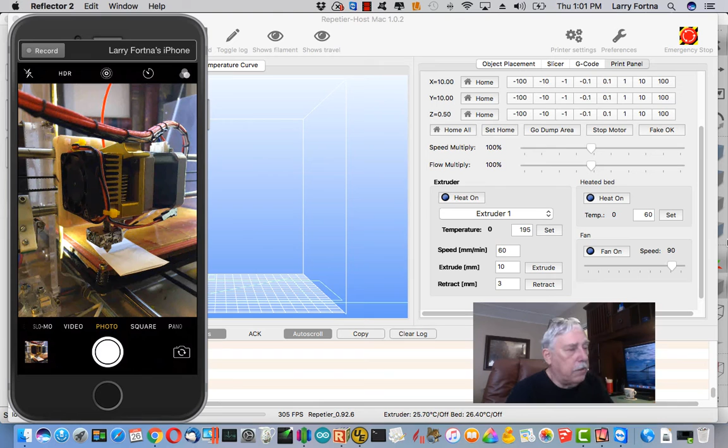I clean it up periodically with a little alcohol, and I have some real super fine sanding pads that are like 4,000 to 6,000 grit, which I can clean it up with. Okay, that said, this was an acrylic printer, and I keep it stabilized because I have it on a sheet of 3/4 inch MDF that you'll see here.

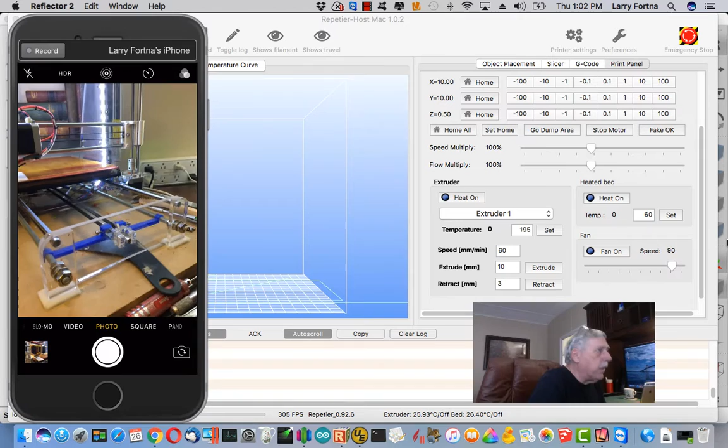Now this MDF is a very flat piece of material, and I've printed some hold downs to keep the 3D printer from moving around. And these are just glued onto the MDF, and then the 3D printer sits on top of that. So I've got hold downs back here, and I've got hold downs over here. And they're not really hold downs, they're just keeping it from shifting, from moving. Other than that, it was stock from the printer that was sent.

And I did find one other thing, which we'll talk about just briefly here. It uses an Arduino circuit board along with a Ramps 1.4 motherboard, which controls the stepper motors and such, and the heat bed. And what I found with these boards is they use a crimp style connector for the heat bed connector, and it builds up a high resistance because there's a lot of current drawn through there.

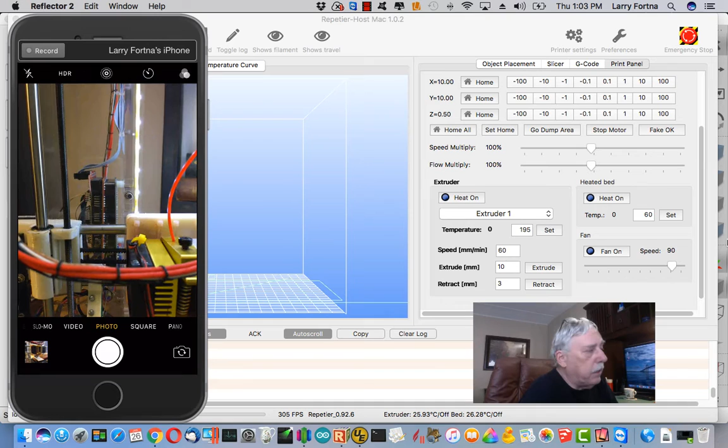And I've actually melted the plastic on one of these connectors, and I have now soldered the heat bed directly to the back side of the board where the connector is on the Ramps board. And what this has done is allows the heat bed to heat up much faster, and I don't get that heat buildup, and so it's safer. I don't have a risk of the thing catching on fire.

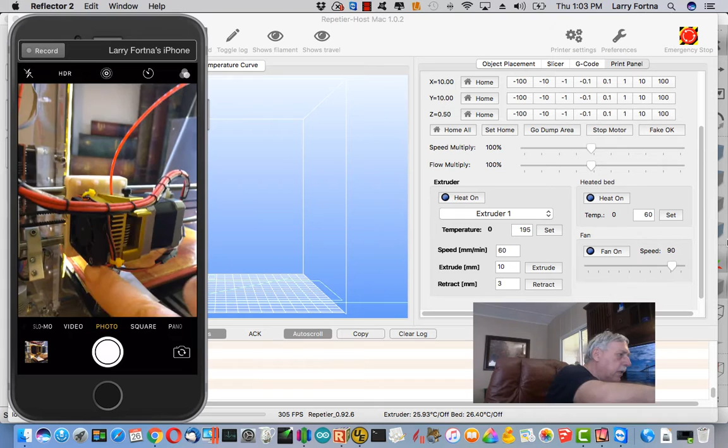So this extruder is the MK7 model, and I just modified it a little bit to put a fan on here. It's held in place by 2 screws, and I have a connector which I can release, and I can take those two screws out, and this heat sink and the fan come off, and I can easily get inside to do anything I need to do to the extruder.

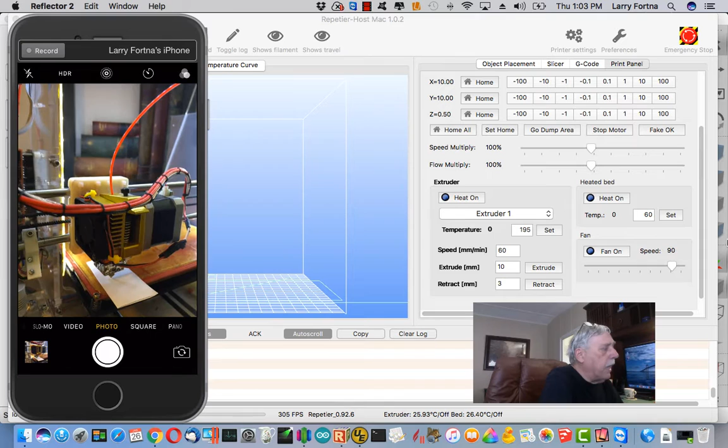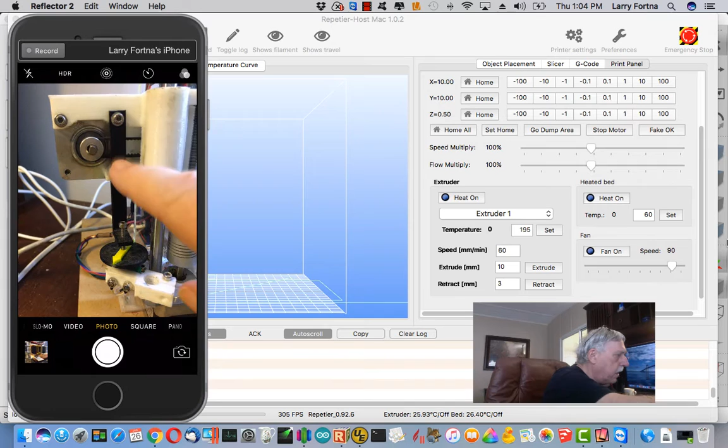Now, the most important part that I added to this 3D printer is right over here. Basically I just took this white piece here that came with it, and it used to go on this shaft, and I drilled a hole in it, and I moved it over here so that I could put my limit switch right under this piece here, which I printed on my 3D printer. And this screw in here is a 3mm fine thread screw, which allows me to do a very fine adjustment of the Z-axis.

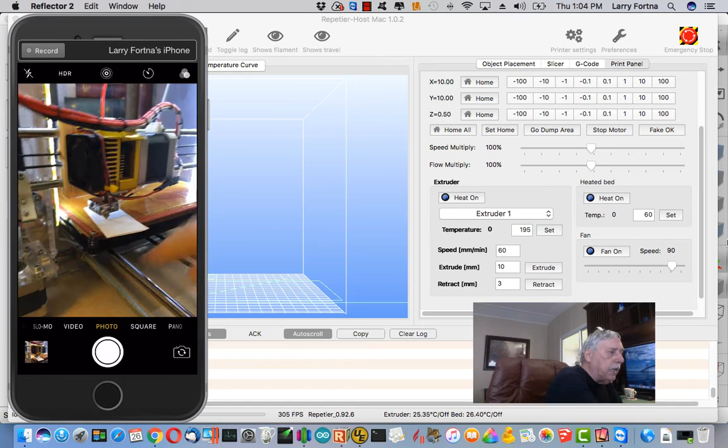Now, what happens when you heat up the heat bed is these little springs over here heat up, so they expand and they contract. And when they heat up, they expand and they bring the bed up more towards the extruder. So when you're adjusting your bed, it's best to do this while the heat bed is at the temperature you're going to be printing.

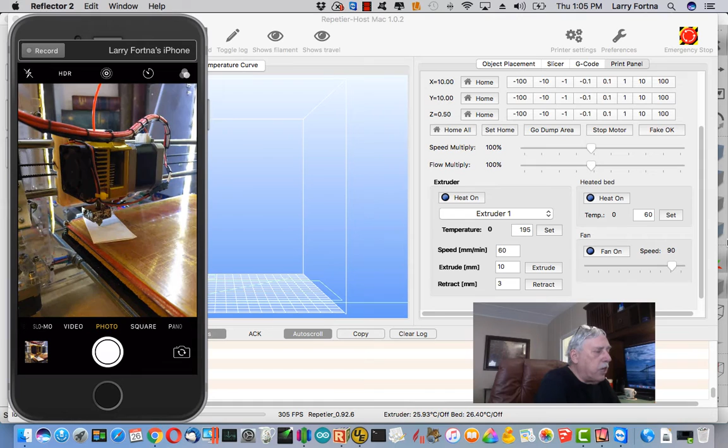I see along the forums there's a lot of folks using these automatic height adjustments. That is not needed, folks. It's not needed at all. You need to spend just a little bit of time to make sure that all four corners of your heat bed are at the same height. And once you've done that, all you need to do is change the relative height of the bed when the bed is up to temperature.

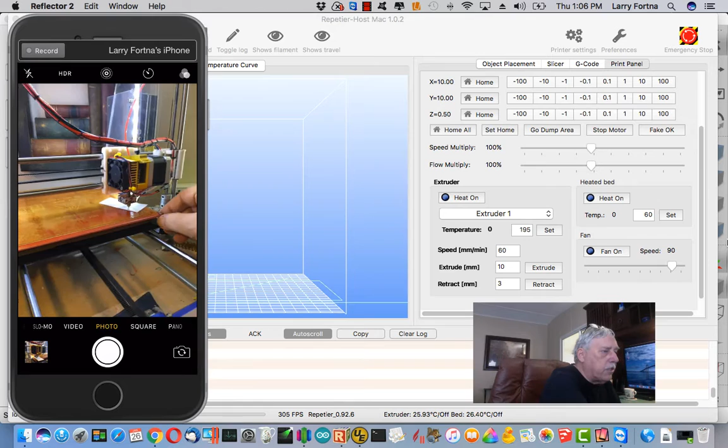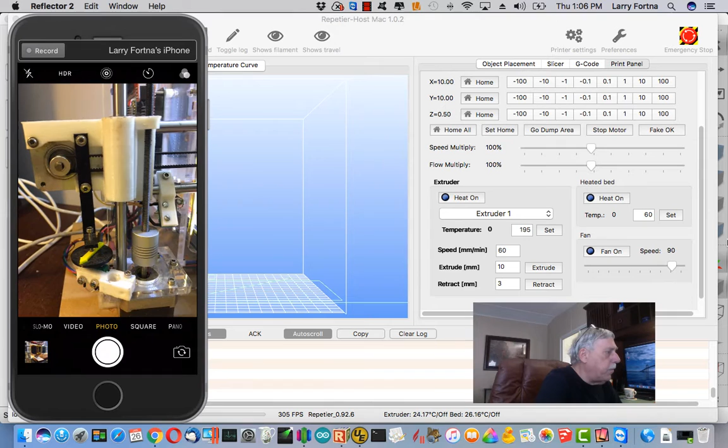So I'm just going to show you how my bed can drag this sheet of paper all around the bed, and it's just lightly touching the tip as I barely move this sheet around. Once this is locked into place, the only adjustment you need to do from there on is to get your bed up to temperature and do a fine adjustment here.

So you zero your Z-axis so that a sheet of paper, which is 0.2 of a millimeter in thickness, just fits under the nozzle. Now this assumes that you're printing at 0.2 of a millimeter. I print at 0.3 of a millimeter, which is okay. That's just going to give it a little more solid adhesion.

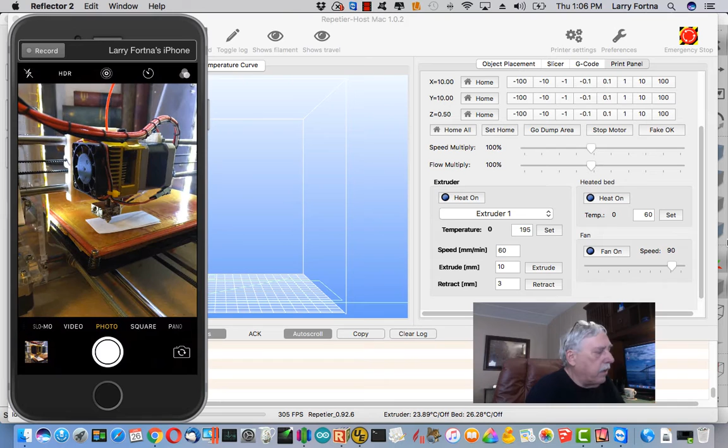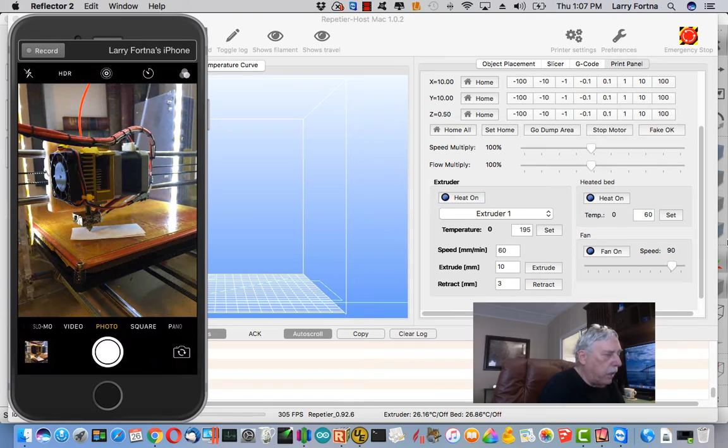Something to be observed here on my 3D printer: when I put the heat bed on, I put some cork. This is 1/4-inch cork that sits underneath the heat bed between it and this travel acrylic that holds the rails and the bearings and such. I put the cork in there to keep the heat from transferring to the acrylic, which will warp it and cause you problems. So that's something you might want to do in your 3D printer.

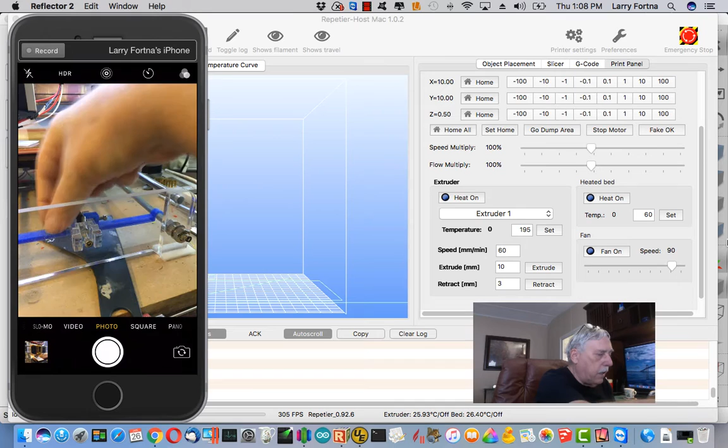The only other thing I found with this particular model was this Y-axis belt tensioner. It was on a spring, and it went side to side, and the belt would jump off the center of the bearings and would fray the belt. So again I 3D printed some supports that I can adjust right here and here, and I got it centered now so that it stays in place, and that gives me a nice Y-axis movement.

A couple of things to consider when you're zeroing your bed, and that is to use a bubble level. I have an application on my iPhone called AppZilla that has a bubble level that reads out hundredths of a degree. So I put my iPhone on the bed here and get the reading, whatever the levelness of the MDF is here.

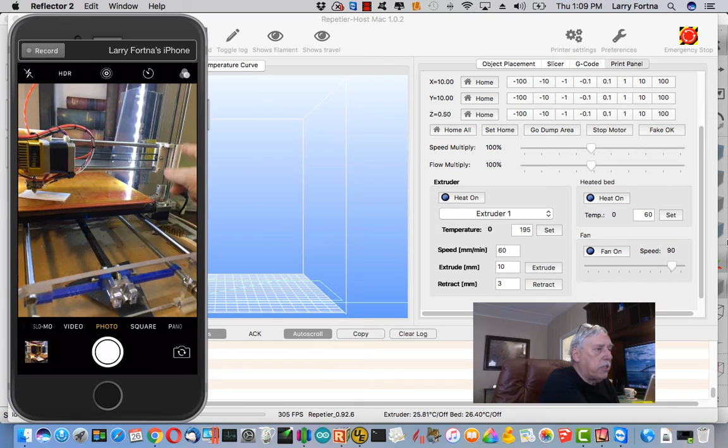And then I make sure that when I put the bubble level up here on this rod, these two should be the same or very, very close to the same, so that you can adjust either side of your Z-axis by turning these stepper motors. You want to make sure that this piece here is level with this piece. And then go through and do the four corners and double check your center.

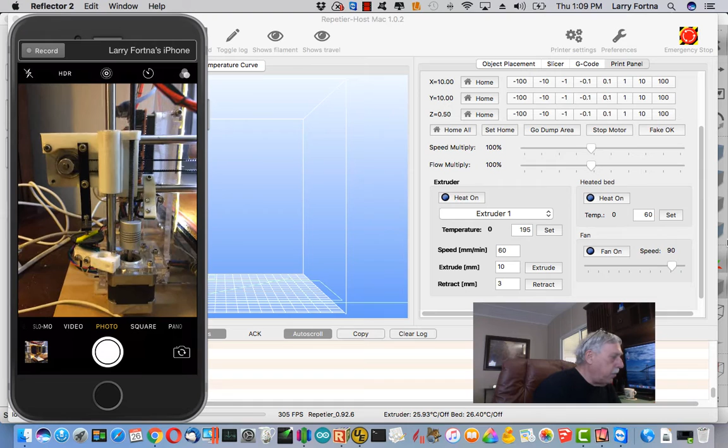Once you've got all that set up, the next step is just to heat your bed up to operating temperature, zero your Z-axis, and adjust this screw so that this piece of paper fits in it just like this. This is extremely loose. It's just barely touching the nozzle. Okay.

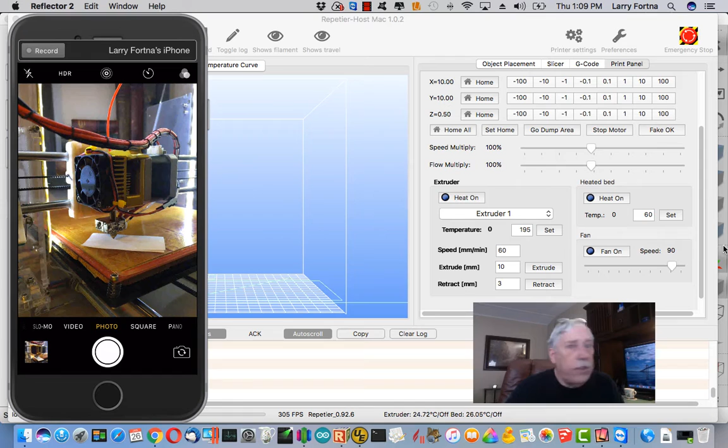Now, with all of that said, let's go look at, I'm using Repetier Host here. I also use Repetier Server most of the time, but Repetier Host to actually do the 3D printing. I don't use Simplify 3D for that. Just my preference. This particular program is for the Mac, and they also make one for Windows. It looks a little different on Windows, but they have all the same settings. And so this is what I'm going to actually print with.

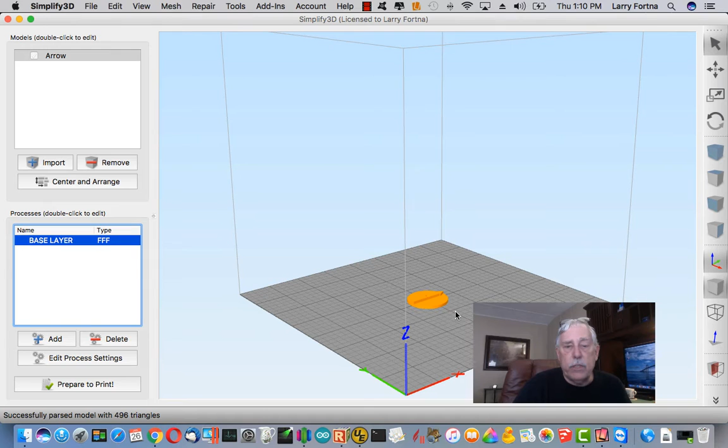But what I really wanted to show you is Simplify 3D, which is a piece of software that generates the G-code for Repetier Host. We're going to print this little arrow that I have on my Z-axis adjustment. And if you'll notice, my Z-axis adjustment disc had two colors in it. So we want the arrow to be a different color than the rest of the base part of it.

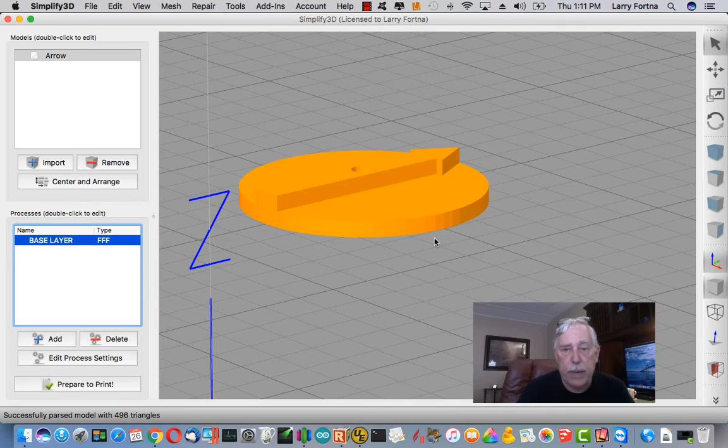So I want to go through the settings that I use on my Simplify 3D and share with you some of the tips that I have run across over the past year that make my prints come out very well. And some of these things I discovered quite by accident. I'm going to talk about that as we examine all these different settings.

So to start out with, let's go to the settings panel. I've just named this first layer base layer. And because I'm using PLA, I have a particular setting set up here also for how much my infill is going to be, which I've set to 55%, and I think that works pretty well.

For the extruder, I've named this extruder tool 0, and this is going to be important when we come to doing two-color prints, because I'm going to give you a different tool number for the second layer that we're going to create. But let's just kind of go through these settings real quick.

I've set my retraction to 1.6 millimeters. This helps to prevent blobs from appearing whenever the layer height changes. My nozzle diameter is 0.40, and my extrusion multiplier I've set to 0.95 only because I don't think I have my extruder calibrated exactly, and it also depends on what filament you're using, but I reduced that just a little bit.

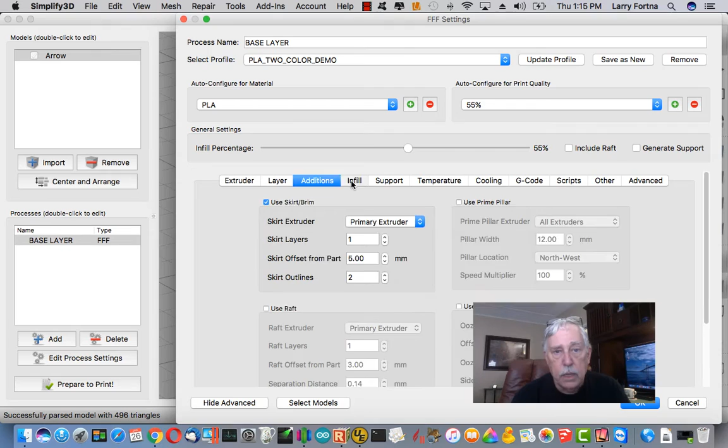As far as additions go, I'm printing a small part here, and I'm going to leave the speed up at 7,200. So for that reason, I'm going to print a couple of skirt outlines to get the filament started before it actually has to start doing the part itself. For infill, because this is the base layer, I think I might change this to concentric because it's a circle that I'm printing. And for my infill pattern, I think we'll change that to fast honeycomb.

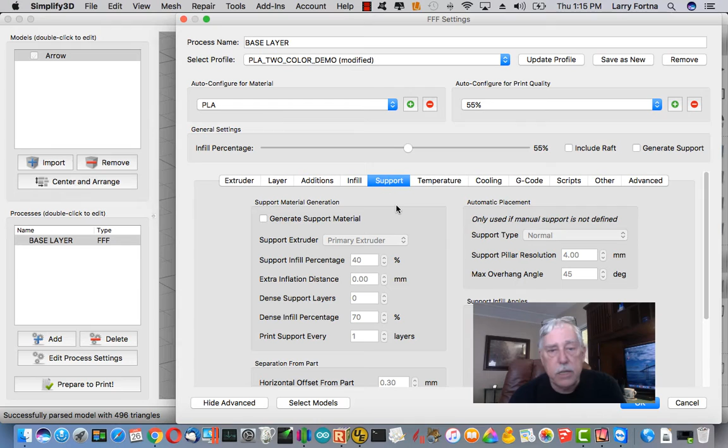I've set my interior fill percentage to 55, my outline overlap to 45%, and my extrusion width to 100%. So those all look good. This particular part doesn't need any support, so we're not going to do anything with that. But let's talk about the temperature. My heated bed for PLA is set at 60 degrees centigrade, and that is more than enough for PLA.

For the primary extruder temperature, normally for PLA I would set this at 195 degrees. But what I have discovered is that if you're printing at speeds of 7,200 millimeters per minute, you need to have that temperature up there. It needs to be hotter so that it can continue to flow at those speeds. The other thing this does for you is the hotter temperature makes the PLA become glossy. So I get a nicer looking finished product at the higher temperatures.

Even if I was to print this at 3,600 millimeters per minute, I would keep that temperature at 226 because it will give me that glossy finish that I'm looking for. If you do it at 195, it's going to handle the filament, it's going to melt, and it's going to adhere, but you're not going to get the gloss out of it.

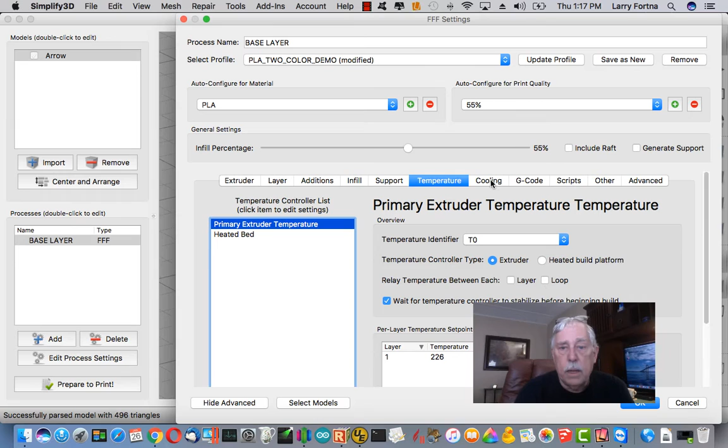Okay, now let's go on to cooling. I just set my first layer fan speed to 40%. And when we get over to the G-code, this is just the stuff that defines my particular printer, so sizes and all of that.

For scripts, my starting script is a G28 that homes all the axes. And all these other scripts in here, except for the ending script, have nothing in them. My tool change is empty. My ending script has some parameters in it to turn everything off when it's done. We covered the other section.

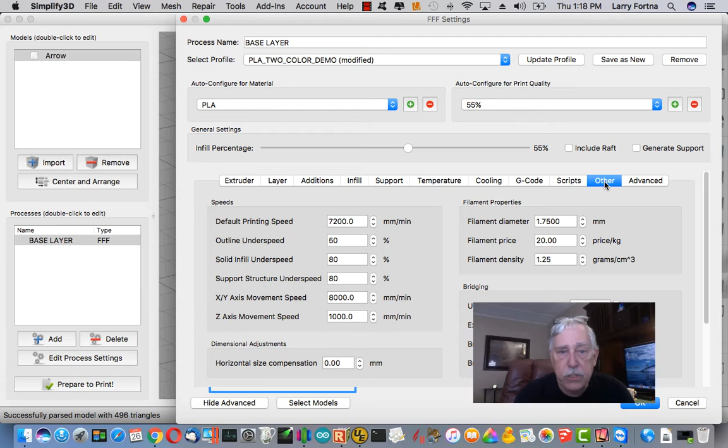That's my section there. And then for advanced, we have a couple of interesting things if we're going to do two-color print. We have a starting print height and a stop printing height. And we're going to use that today. But first of all, we need to know exactly where we want this two-color print to start. And to do that, I'm going to go up here and view the cross-section.

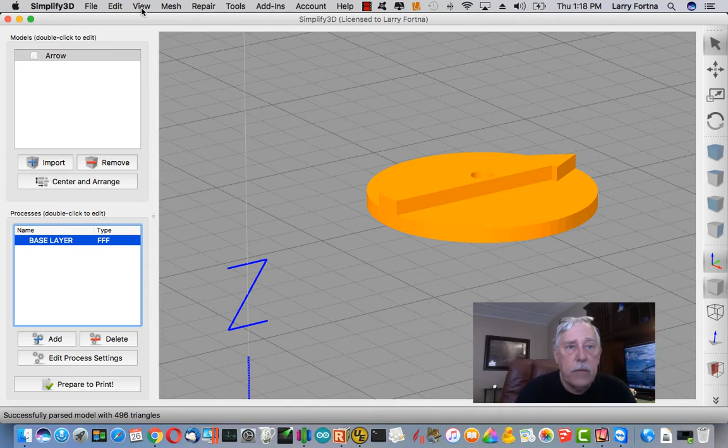And I'm going to start bumping up the z-axis here. And once I have found a point where the base layer is complete and the next layer, the arrow in this case, is going to start, I'm at about 2.1 millimeters, maybe 2.2. If you're using a 3/10 of a millimeter height, then you probably want to use 2.1 millimeters as the settings that we're going to use next.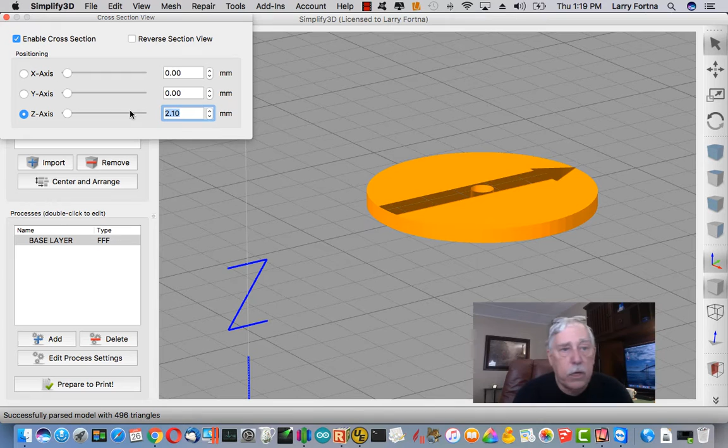So now that we know that, we'll go over back to our settings and we'll go to Advanced, and we're going to do Start Printing at 0, but we're going to stop at 2.1 millimeters. Whoops, I'm sorry, I didn't mean to. Now I got to go back and do that again. Okay, and let's OK that so it saves it. Okay, now we have our base layer taken care of.

Now we're going to add another layer, and this is going to be a copy of the first layer, and we're going to call this second color. Okay, so now what I want to do here is go back to the Advanced tab, and now I want this one to start printing at 2.10 millimeters, and I'm not going to have a stop printing height. I'm going to let it complete.

But here's the important thing I need to do next. I need to go over to this extruder on the second layer and tell it that it is tool number 1. And the reason for that is because I want to go into my scripts over here, and I want to add something in the tool change script. And that's something that I want to add is a command called M600. And this is a filament change command that is used in Repetier and also in Marlin firmware.

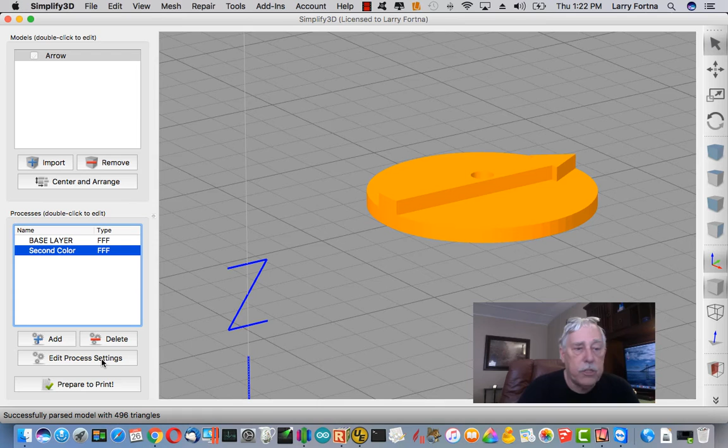So we only do this tool change on the second color layer, and we have to change the extruder to be a different tool name so that it knows that we're changing tools and it knows to execute this M600 command. Okay. So now we've got pretty much everything set up that we need. Let's go ahead and prepare to print. I want to select both layers because we're going to print this entire thing in one shot. And this is going to be continuous layer by layer printing.

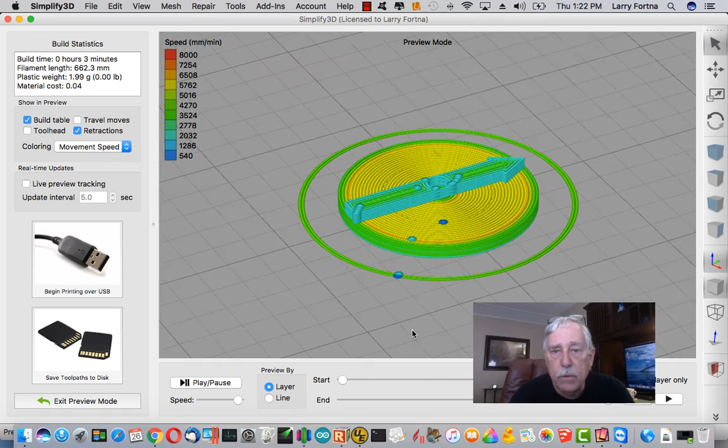And you can see here, this is what the final result is going to be. I don't really like this little space in here, but I'm not going to mess with that right now because I really just want to show you how to do the 3D printing. When we look at the final printed object, you're probably going to see a little bit of a part in here that I don't really want, but neither here nor there. Anyhow, let's go ahead and save this out. And I'm going to save this out to my desktop.

And then I want to show you the G code that got produced by this. So this is my G code, and I'm going to look for that M600 command. And there it is. So we're at Z height of 2.4, which is just a little bit above the 2.1. So 2.1 is the base start. We add 3/10 to it because that's the filament height that we have. And we're at 2.4 on the Z-axis to start doing a filament laydown of a second color.

When the 3D printer hits this M600 command, it's going to eject the filament. It's going to move the print head out of the way before it does that. It's going to allow us to insert new filament and clear the nozzle of the old color. And then when we press on the knob, it's going to allow us to put the 3D printer head back where it started from and continue printing. So that is what we need to do.

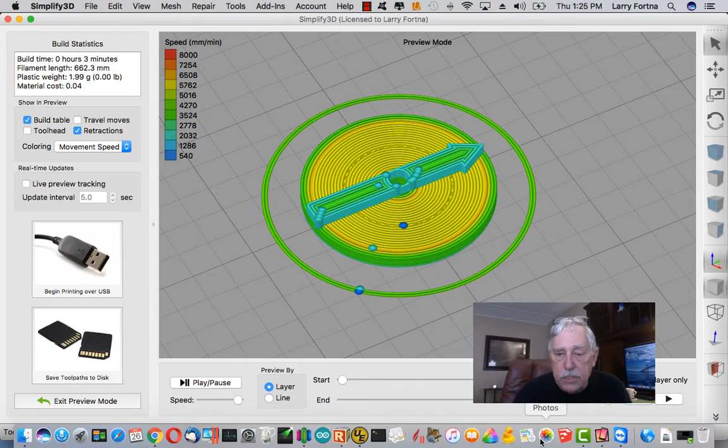The next step I'm going to go ahead and do is we're going to bring up the Repetier Host, and I'm going to turn on the heat bed to 60 degrees. I'm going to change my temperature here to 226 degrees for my extruder, and we'll let the bed start coming up to temperature. And once that reaches temperature, then we're going to zero out our Z-axis and get it ready to start printing.

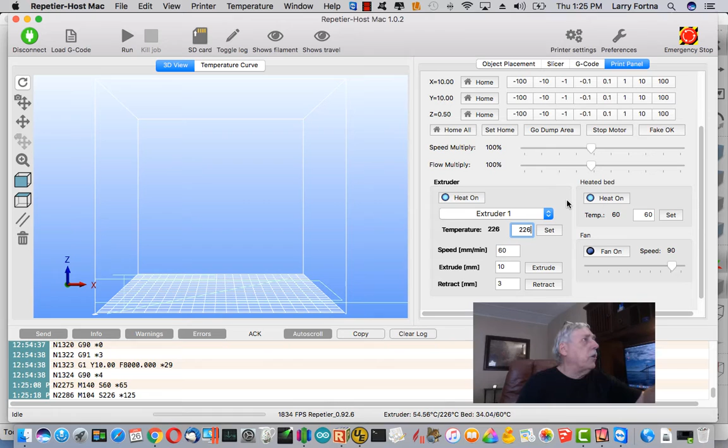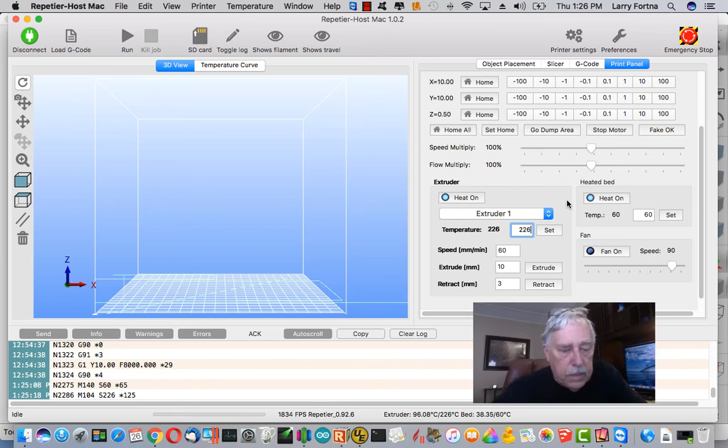So I'm going to pause for a moment while everything comes up to temperature, just to show you here. This is what my display looks like, and as you can see, we're 36 degrees now, and we're trying to get to 60, and we're at 79 degrees on the extruder, trying to get to 226. And so at this point we're going to pause, and I believe that is a command shift.

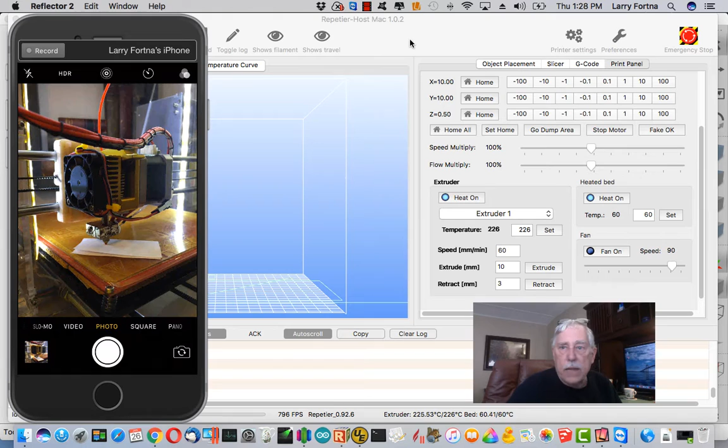Alright, our bed temperature has now reached its optimum. We're at 60 degrees on our bed and 226 roughly on our extruder, and now it's time to go ahead and zero out our Z-axis. And to do that, I'm going to have to switch over to my print panel, and let's move some things around a bit. Let's put this over here so I can continue to do this. I'm going to go ahead and zero the Z-axis. I'm pretty sure this is not going to be zeroed right now.

So we're up to temperature, and what I'm going to do... Oh well, this is pretty much right on. I'm pretty much happy with that. I like that. If I needed to adjust my setting, what I would be doing here is turning this adjustment screw probably about 1/4 of a turn. It's usually all it needs.

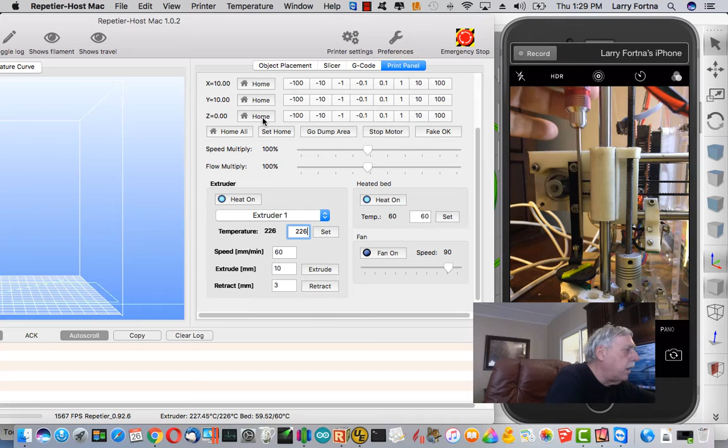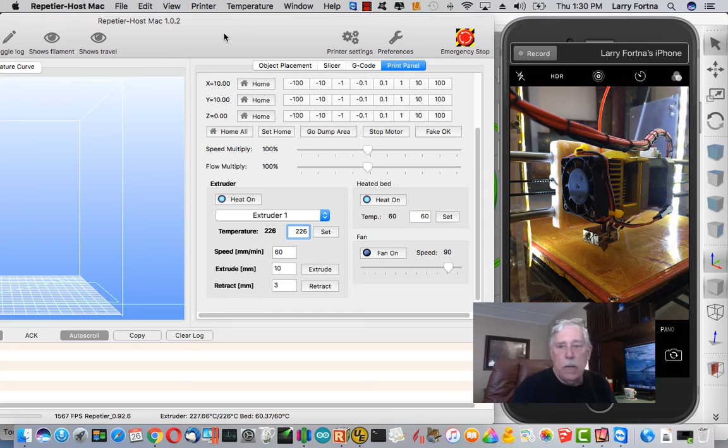The reason this was adjusted properly is because I had zeroed it earlier, and then I went in to the print settings and I actually bumped up the Z-axis about 3/10 of a millimeter while the unit was cold. So that is just about how much those springs expanded when we went from room temperature to 60 degrees C. So now we are just about ready to start printing.

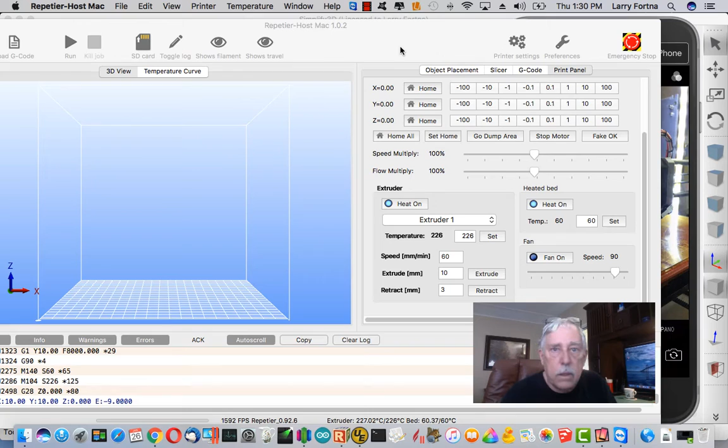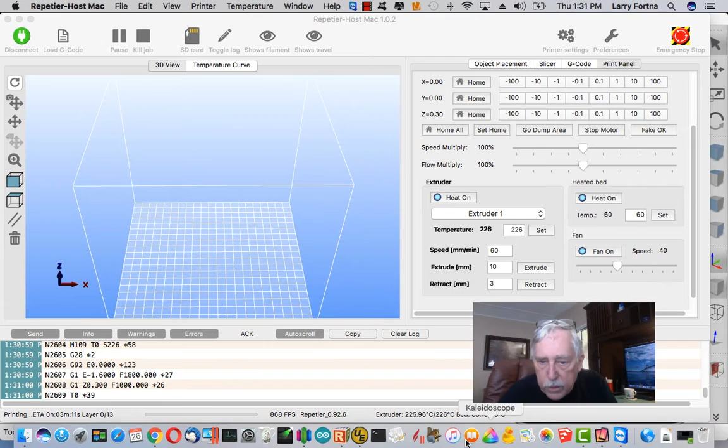I'm going to have to cover this up for a moment to hit the run button. Let's go ahead and do that. Did I do it? No, let's do it. Well, oh, we got to load the G code. Minor little problem here. Okay, there we go. There's our part. Now we're ready to run. So there we go. Let me get back to this.

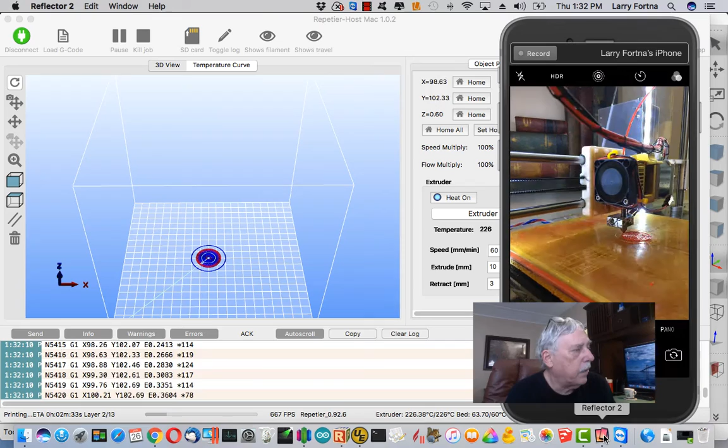Now one thing S3D is doing is it has slowed down the printing a little bit because it knows it's doing these circles, and it can slow it down on its own. This can go quite a bit faster. We're on the first layer, which is 0.3 millimeters at the moment. Now that we're at the second layer, we're going at full speed, 100% at 7,200 millimeters per minute. And we're at 0.6 of a millimeter at the moment.

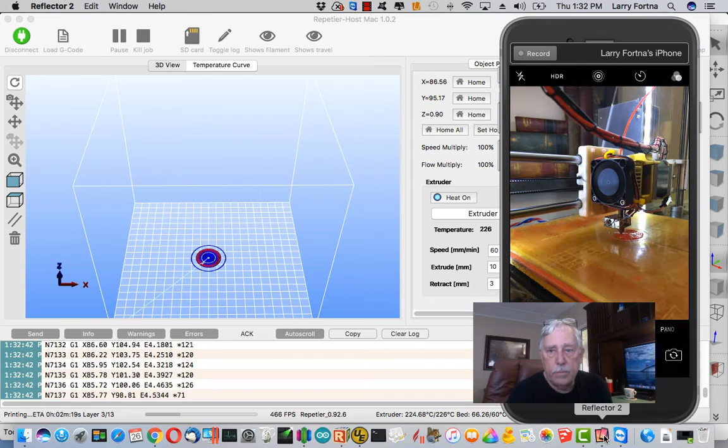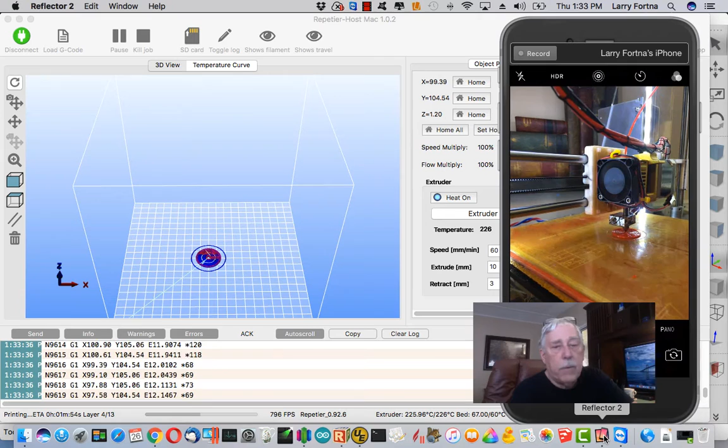All right, we're on the third layer at 0.9 millimeters on the z-axis. And remember, we've got to go to 2.4 for a color change. We're at 1.2 now. And now we're doing that infill part, which is this crosshatch pattern, if you will. We're at 1.5 millimeters now. We're doing the outer edges.

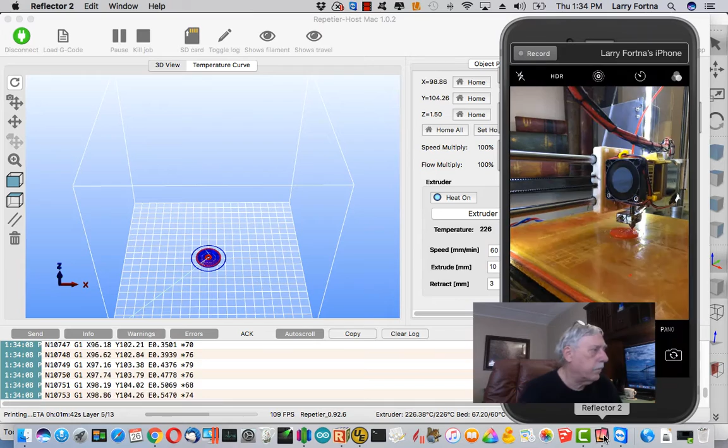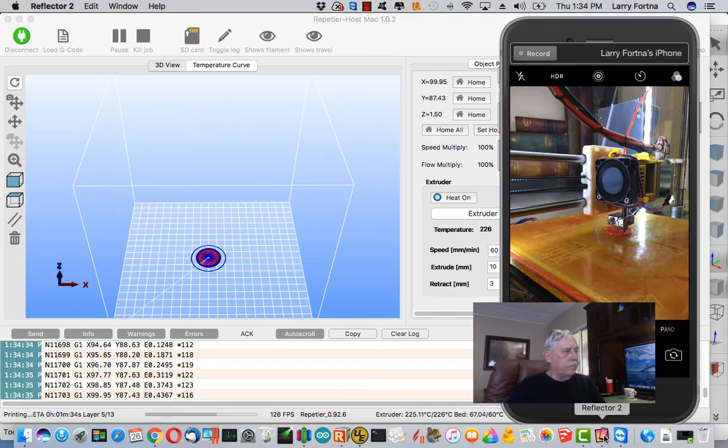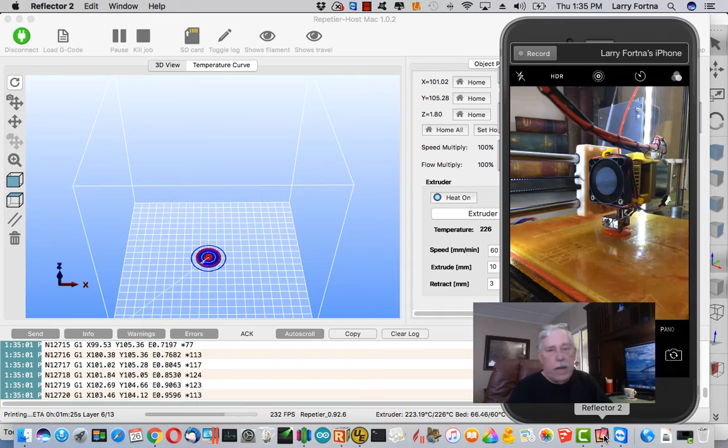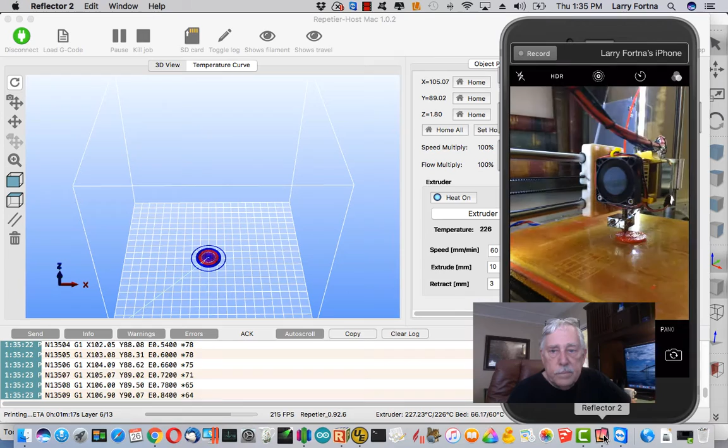And we're actually starting into what's called the top 3 layers. So we only did 1 layer of infill with the crosshatch pattern. We're now at 1.8 millimeters. And again, the part that we're reproducing is this disc that we have on the z-axis. We're now at 2.1 millimeters.

This is getting very close to approaching our point where we're going to be doing a color change. When it finishes this layer is when we're going to get the tool change code executed, and it's going to execute the M600 command, which is going to allow us to retract that filament and put a new color in place, and then resume printing from there.

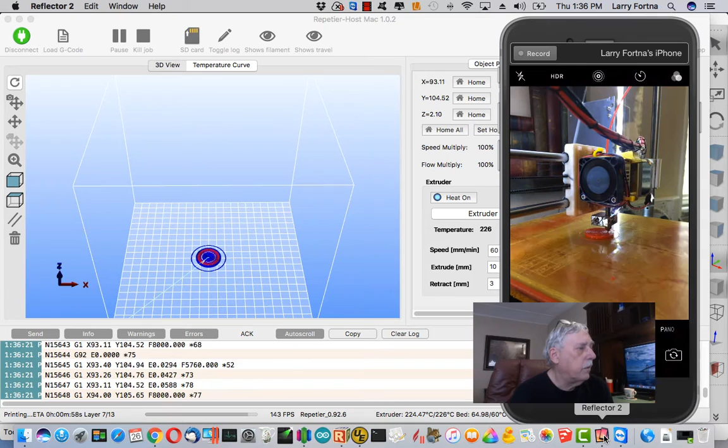And you just heard it happen. And it just retracted the filament. So this is my old filament. What I'm going to do is cut that end off. And we're going to get out some white filament because that's just what I have loaded up here.

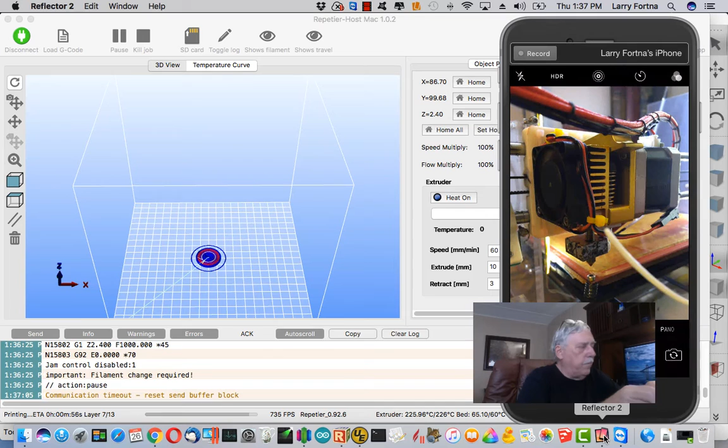And we'll clip the end of the filament at an angle. I don't know if you can see that in there, but that's a nice 45-degree angle. And then we're going to attempt to straighten out the filament as best we can and reinsert it into here.

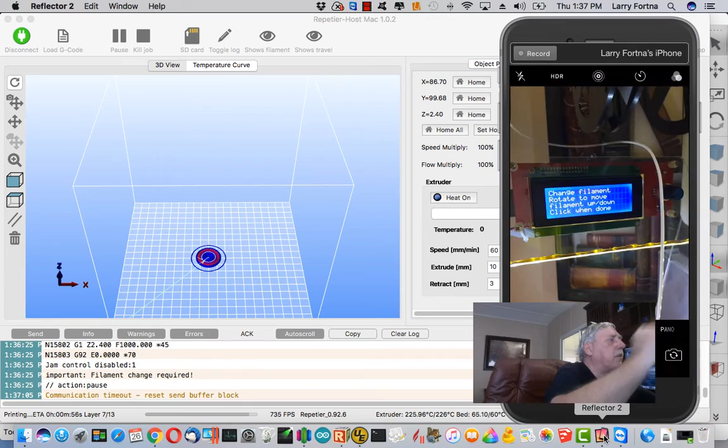And then, let me show you here the display. The display is telling us to change filament, rotate to move. So all I'm going to do is start rotating the knob here. And what that's going to do is it's going to allow us to get rid of some of this old color that we had in here.

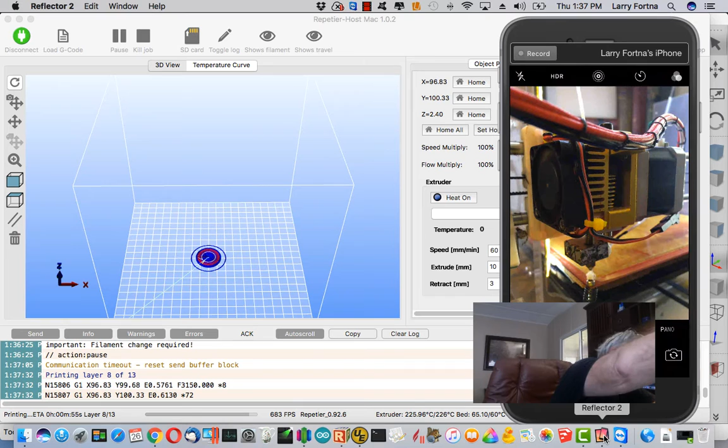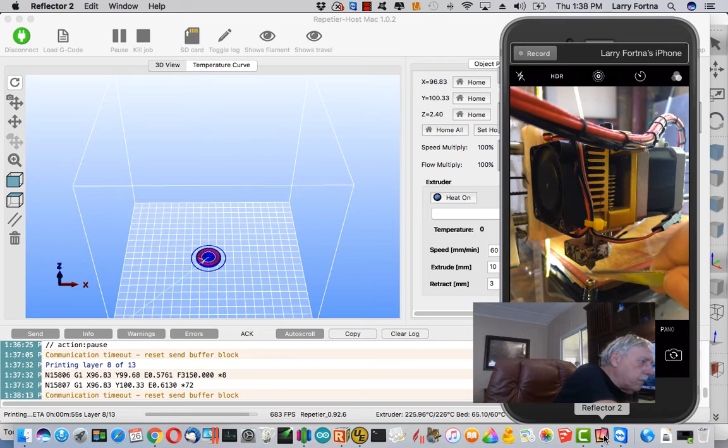And I'm just going to grab some tweezers and pull that out, rotate it some more, make sure we got a nice bit of white flowing through the extruder, because that's our new color. We were doing some red, and it's still oozing out. So I'm going to kind of wait for that to stop oozing. That looks good. And now I am ready to press the knob and resume printing.

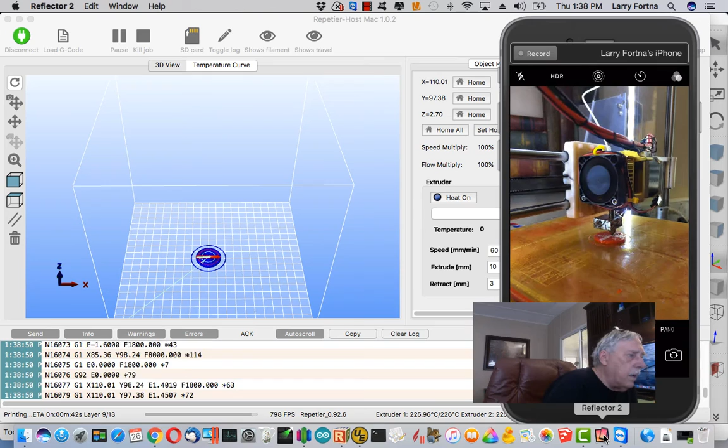So here we go. And I'm going to go ahead and grab that last little bit of material. So as you can see, we have effected a color change. We're now printing with our second color. And so this arrow component of that part is now being printed.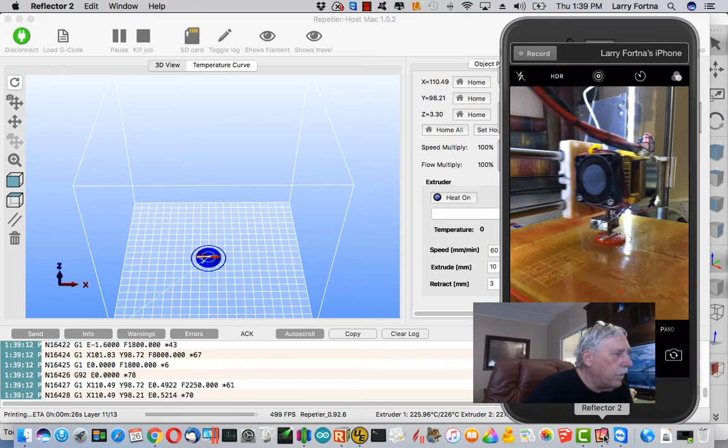And if you really want to see the difference that 8,000 millimeters per minute makes on your speed, you need to do that with a much larger part than this one that I'm doing here. If you're doing a large part, this print head will get up to speed.

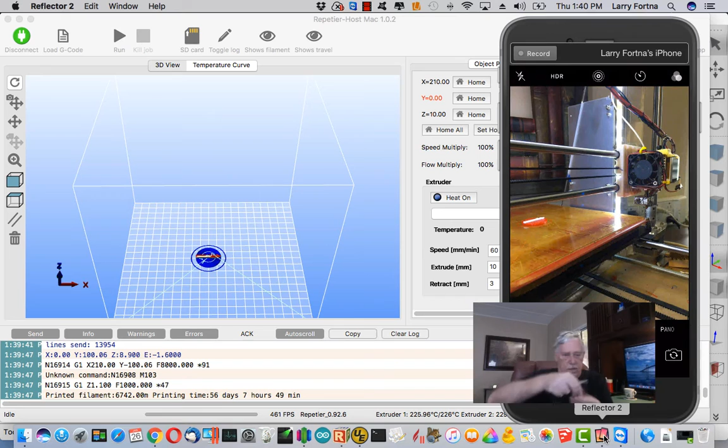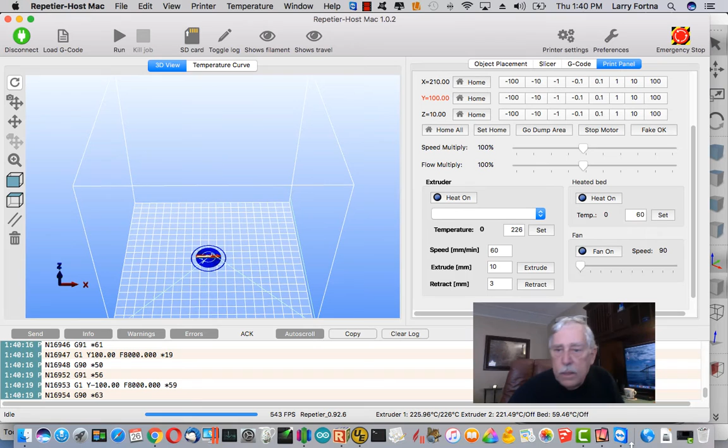Okay, so we're done here. Boy, we had some excess plastic come out of there. Okay, there's our part. And let me go over here and move the, whoa, let's go back. Alright, let's get the phone back up here. Okay, there was a little glob of plastic here. I'm going to have to file that off. I don't know why that took place, but I've never used this white filament like this.

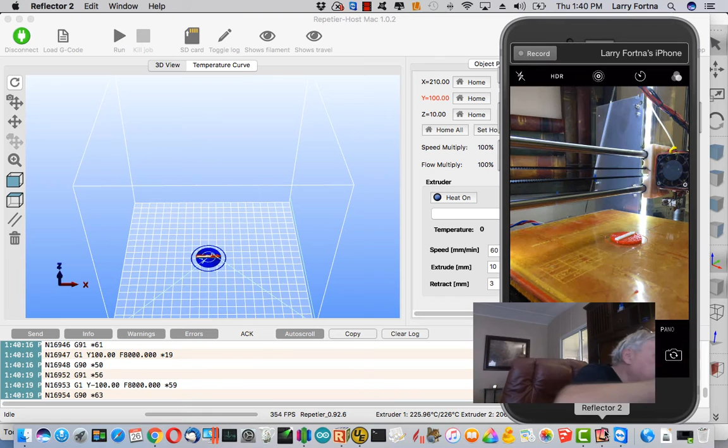This is kind of why I keep tweezers around. And so while we're talking about tweezers, let's talk about the rest of the tools that I have. This is just a tool to do the socket heads. It's a 2.5 millimeter hex tool. This is a tool that I'm going to use to get components off of the bed once it's cooled.

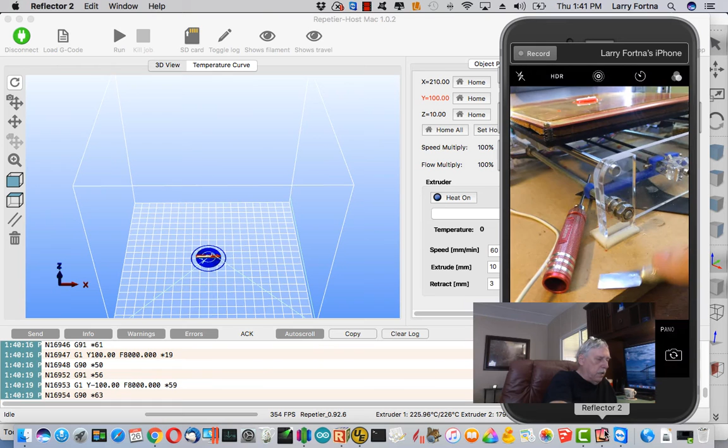And this tool here is an X-Acto knife with a flat blade on it. And I really like using this tool because it's flexible. This bends, and it's got a nice taper on it, so I can get that underneath the part. And all you need to do is break the adhesion. And once you've broken the adhesion, the part will pop right off of there. But you have to wait till it cools.

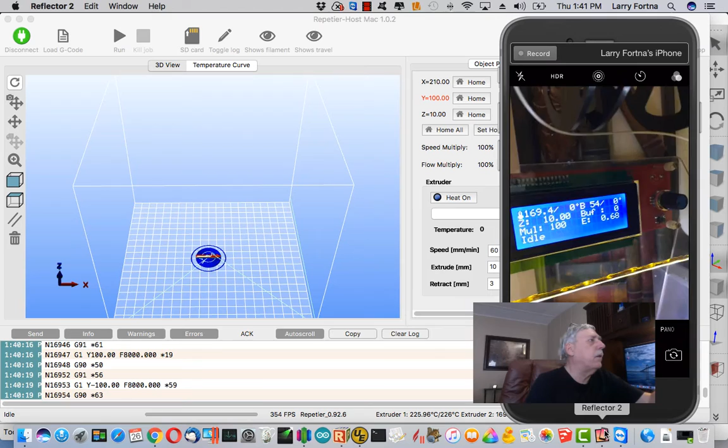And so right now we're at 54, and we've got to get down to about 25 or 30 degrees C before we pull this part off of the bed. So at this point, I'm just going to pause the presentation. All right, we're resuming from where we left off. The temperature has dropped down a little bit. We're now at 43 degrees, which is not ideal. I'd rather have it a little cooler, but I'm going to go ahead. I know that I can remove the part at this temperature.

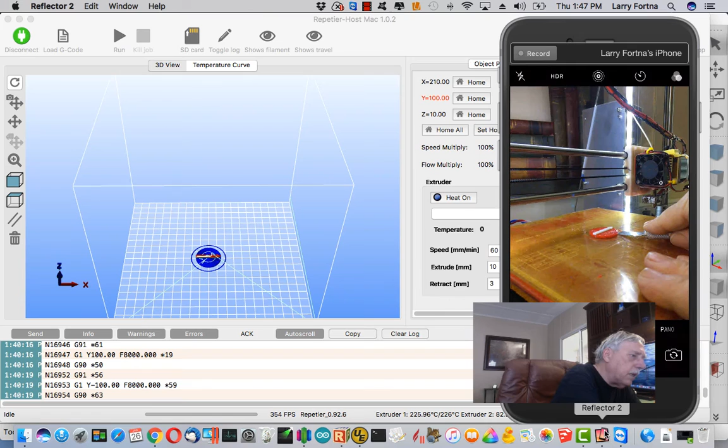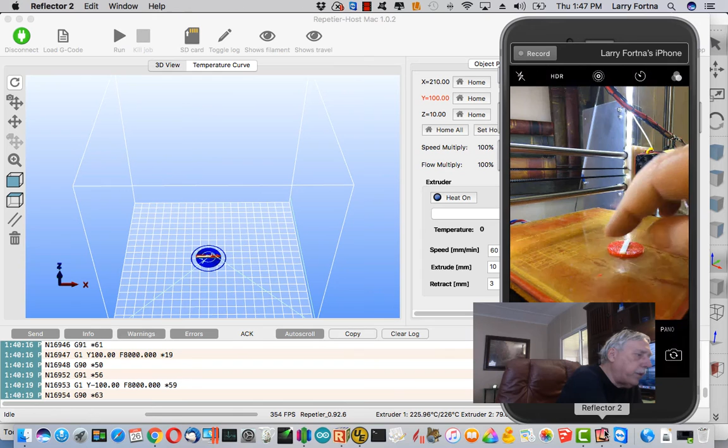And so what I'm doing is using this little flat-bladed tool to get in here just a tiny little bit. And if you noticed right then, the adhesion broke free, and this part is now free. Okay, and this is because of this PEI bed that I'm using. This is wonderful stuff. If you do nothing more to your 3D printer, do yourself a favor and order yourself a sheet of this PEI and put it on your 3D printer's bed.

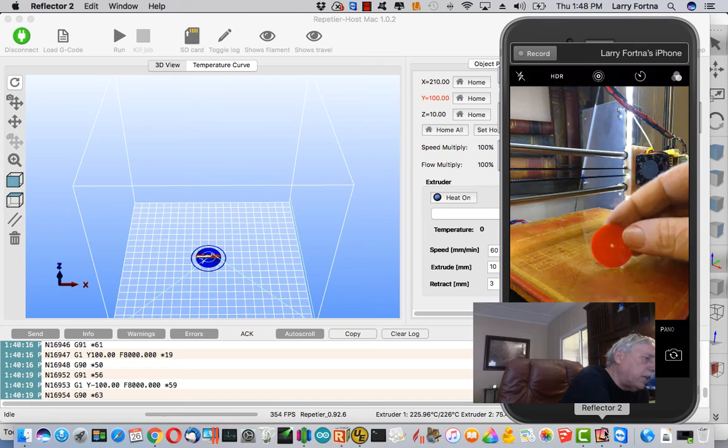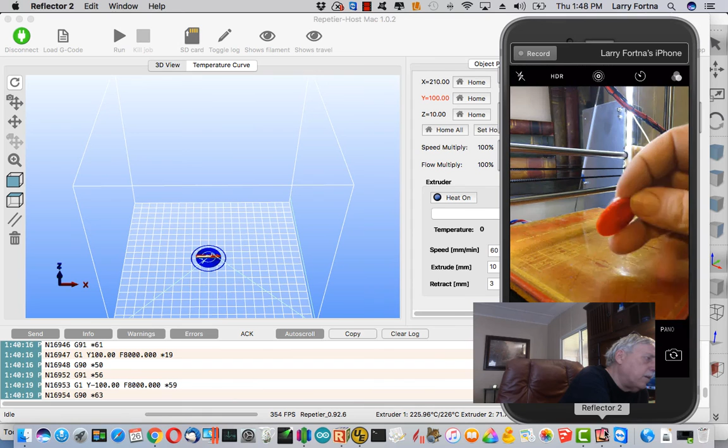Let's take a look at this part. You might be able to see the gloss: the temperature of 226 degrees with PLA gives you a lot glossier finish. And this is our two-color part here. This could have been a little better quality if I'd have slowed it down, and if I'd have done it at 0.2 of a millimeter layer height. But this is not bad for this piece of material that we're using for what we're making out of it.

It's just fine. And it illustrated the purpose that I needed, and that is how to do two-color printing with Simplify3D. And I hope you enjoyed this presentation.